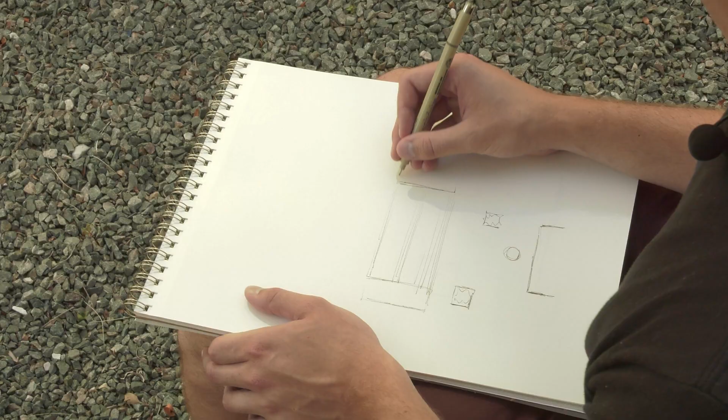Now they're kind of important because they're some of the most centrally located, so that gives us a clue of their importance. They're some of the bigger buildings on campus, so that's another way we know they're important. Old Main's the original building, so of course it's important.

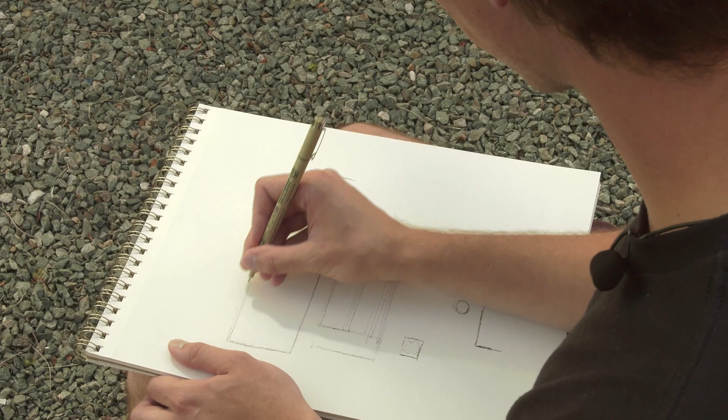Clues like this give us an idea of the spaces that really define our community. You're going to be looking at natural systems as well, movement and circulation, program and usage, and in this one, architectural systems.

The value in looking at these four different categories of information and design is that once you look at each on their own, you'll notice they don't distinguish from each other so easily. It's not that you have architectural systems and program clearly separate - these things start to blend together and overlap.

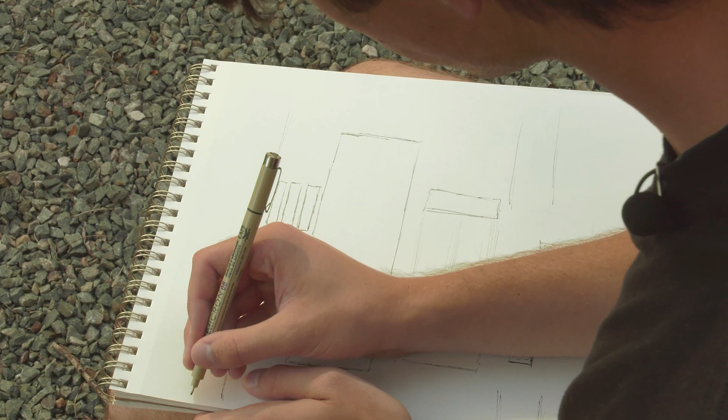As you notice that, you can detect those impacts on your experience in the space. It's also important because there's a pretty important circulation aspect to where I am right here. There's a sidewalk that runs right through here, and right behind me is the central axis through campus that I was talking about. People will move through campus, through these buildings, because of that central avenue.

When we look at architectural systems, I can see that these big openings between these buildings and this portico behind me inform even people who aren't familiar with campus that they have access to those spaces and can use them to traverse. When you do that, you create a very dynamic sense of movement and space through a community.

So when you are looking at your own communities, it's important to look for those sorts of things as well. Now that you've observed, made a mental map, and taken notes on your paper, you have a good understanding of what architectural systems are, and you're on your way to understanding your neighborhood and community in a much more cohesive way.

Wherever you live, a neighborhood in a downtown with many buildings, or in the countryside where you're surrounded by greenery, there is always some natural systems present, even if you can't see them or notice them much.

Our urban parks may have been originally built to provide non-nature benefits in our cities. However, often we find parks designed and managed to allow nature to play a more prominent role, with native plants and wild areas complementing the more carefully designed and managed parkland.

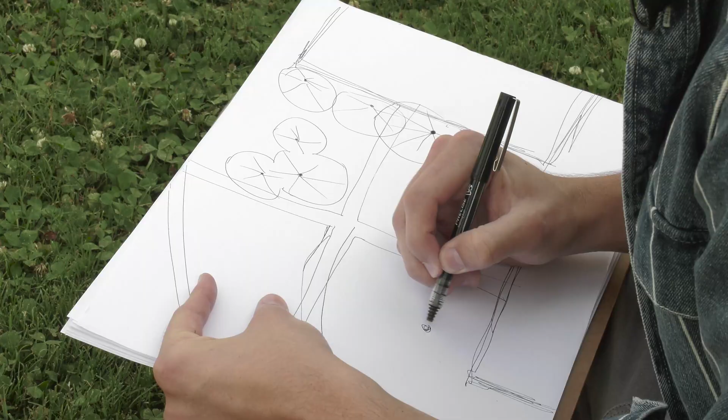It's really beautiful. I want to take special note of a really old tree right to my left. It's a blue Atlas cedar and it has a really interesting Dr. Seuss kind of shape, so I'm going to draw it with more intention and care than the rest, documenting its really massive trunk and its strange little branches pulling off of that trunk. There are a number of ways to pick out a landmark in the landscape, but trees, especially interesting ones like this, are some of the best ways to do so.

Here's a point where I would normally start to document shrubs and some of the smaller species around the neighborhood. One part of observing the landscape that you have to learn with practice is looking for what's not these big, huge elements. Trees are easy because they're so evident, but think about what systems are hidden, the ones you can't see right at face value, and even the ones you can't see at all. I can learn a lot about what a habitat is like, or what my neighborhood's like in terms of natural systems, if I pay attention to the wildlife around me.

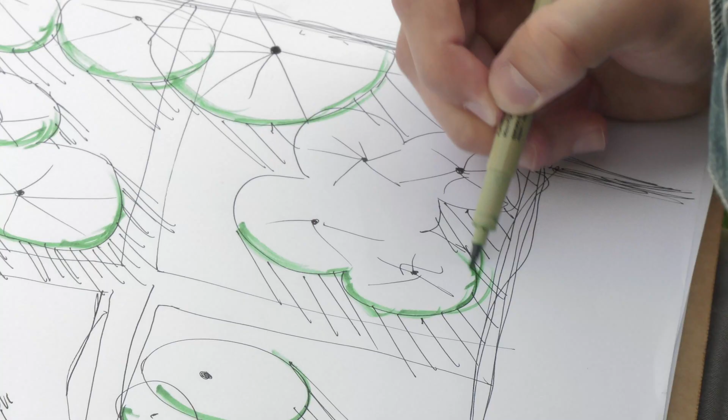So just to give this drawing a little more depth, I'm going to add some green to the trees to give them a little punch on one side. I like to do it on the shadow side. I'm also going to drop a little bit of a shadow just off the edge of that canopy with my black marker.

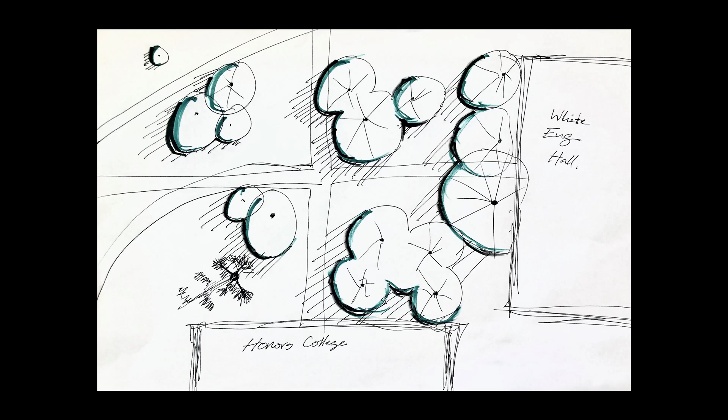So I think I'm pretty happy with this drawing. I started with my network of paths and my buildings to give it an anchor. I documented where the significant clumps of trees were. I took note in my head of the wildlife I see, some robins, some insects. And I added a little color and dropped a little shadow to give the tree some depth and make it stand off the page. The important thing to remember when documenting natural systems is you want to do what speaks to you, and the more textural and expressive you can get, the better. It's really hard to document all the colors and textures you see around you, but by sketching them and putting them down on paper, you can start to get a feel for what the space is like and what it means to you.

Designers, planners, and others are realizing the importance of circulation systems, including bicycle and pedestrian systems. So local leaders in Northwest Arkansas, for example, have designed, planned, and built many miles of paths and trails, including the Razorback Greenway stretching from Fayetteville to Bentonville.

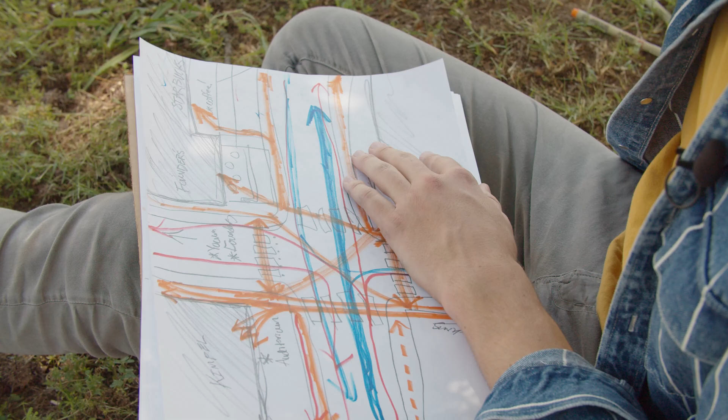I also want to take note of material. So McElroy, where it turns into a pedestrian street, actually turns into an asphalt paver instead of the typical poured asphalt, and this helps delineate that it's not a vehicle road. This is a pretty typical scheme when a designer is trying to communicate that a street has a different purpose than you might consider. So a sort of paving material feels a little bit more precious and says, hey, pedestrians are welcome here. This is only really for vehicles on special occasions.

And then I'm going to add just a few sidewalk joints to help communicate what is sidewalk versus what is street. After that, I think I'm going to consider this drawing done.

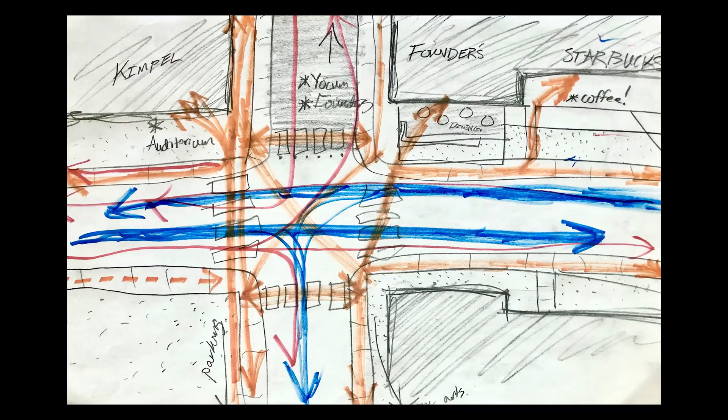Our cities, towns, and neighborhoods have uses and programs. We can look at this lens when we create a mental map. For example, many of our downtowns host a mix of uses in the same neighborhood, block, or even in the same building. This is often referred to as mixed-use development or mixed land use.

Coffee shops, restaurants, and other places to get food are some examples of places that you might walk to in a downtown. We might look at formal uses like bookstores or libraries, or even small-scale book sources like little free libraries that are in a number of neighborhoods.

Use also can refer to outdoor uses, such as recreation places, water parks, art, and other types of uses. Finally, use can also include neighborhood meeting places that are more personal to you. It might be a tree house or a special place where you meet with your friends or others. Can you think of what these kind of uses are, both formal and informal, in your neighborhood?

Hi, my name is Kirsten Rouse, and I'm a fifth-year architecture student at the University of Arkansas. Today we're going to be talking about Champions Hall, located on the intersection of Duncan Avenue and Dickson Street. We're going to be discussing how it's a primary example of use and programming in an area.

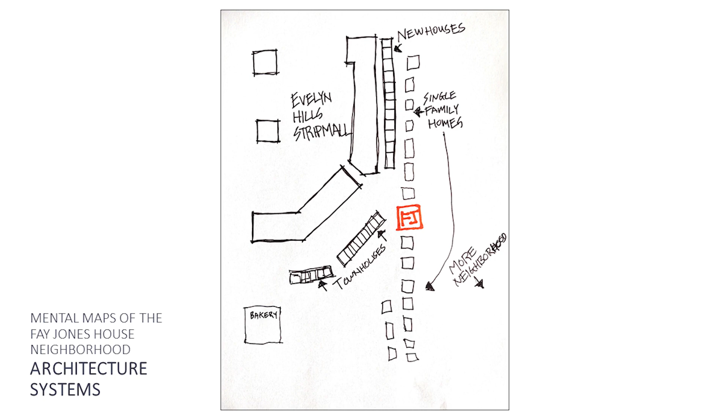The program or use systems include, as mentioned before, single-family residential. There's what I think are condominiums near the Fay Jones house on the hill above Evelyn Hills. There's a bakery, Rick's Bakery, down the street. And there's a number of retail and other establishments in the Evelyn Hills Shopping Center below the hill, northwest of the Fay Jones house.

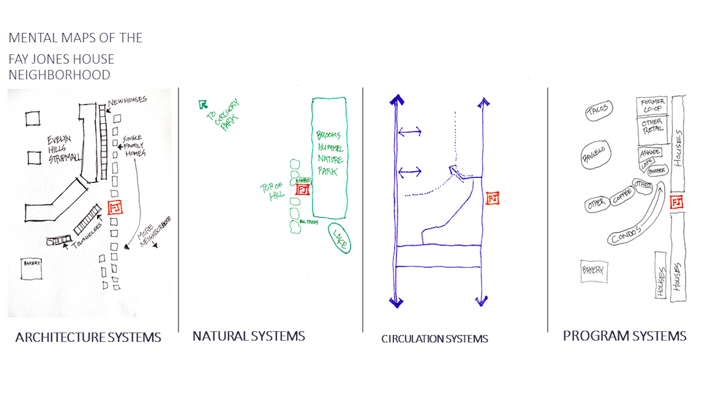You can put all these together side by side or even layer them on top of each other, and you can see how the different systems potentially interact with each other. Remember, these mental maps are your understanding of your neighborhood and your place, and they're a really important way to understand the value of a neighborhood from the perspective of the people that live there. Planners and designers are actually using mental maps to understand how cities work and how they actually work for residents that live there. So it's a very powerful tool.

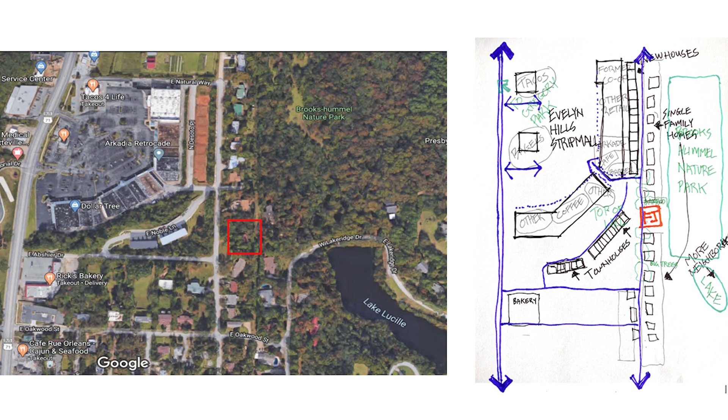It's a tool that you can use to help guide your designs for this summer and your design ideas as you go forward. By the time you finish your mental mapping exercise, you'll have several different layers of information that you can then put one on top of the other and create one holistic map, one holistic vision of your interpretation of your neighborhood.

And really, again, it's important to understand that, first of all, you don't have to be a great drawer. This does not have to be 100% accurate. This does not have to be something that you could give to somebody else and they could measure. This is your interpretation. So you can find the balance that's comfortable for you between drawing things that are your interpretation and your perspective on why something is important, and on the other hand, something that relates to how a building or a landscape might be important to other people as well.

So think about scale, think about position, think about the things that buildings and landscapes are made of. But of course, what really makes these maps personal and a reflection of your understanding is it's about your memories, your perceptions, and your associations. So the most important audience for these drawings, these maps, at the end of the week is you.